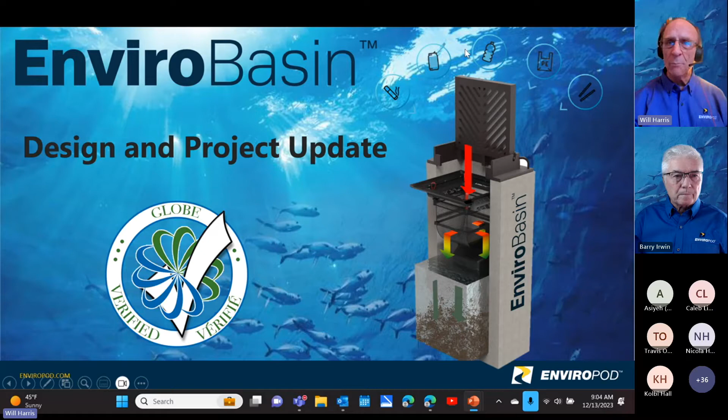I'll be providing an overview about EnviroPod and the LittaTrap, which is our primary product that we introduced to Canada and North America back 4 years ago. Then I'm going to turn it over to Barry Irwin, who's going to do a deep dive into the EnviroBasin design, applications, and different project installations throughout Canada. This will be an opportunity for you to see how this system has been introduced and launched. It's a real game changer of a product, but I'll let Barry take it from there, and we'll start the presentation.

So a little bit about EnviroPod and who we are. EnviroPod was founded by two gentlemen located in New Zealand, Mr. Mike Hanna and Greg Yeoman. As you can see from the photographs here, back in 1996, the company's been around for 26 years, starting in New Zealand. EnviroPod is part of the Stormwater 360 group, which is a leading stormwater and green infrastructure manufacturer and solutions provider in the Australasia region. It's the largest Australasia catch basin insert company, as well as a distributor of different stormwater technologies in that part of the world.

About 4 years ago, both Greg and Mike ventured into Toronto and lived there for a year to get an idea of the market and the issues and demand for stormwater products such as the LittaTrap. They came away with quite a bit of information, finding that demand was rather high, especially around Lake Ontario and the Great Lakes region. From that point forward, over the last 4 years, EnviroPod has been very much involved in providing LittaTrap as well as EnviroBasin products throughout the Great Lakes region, as well as other parts of Canada, including Vancouver and Nova Scotia. We're pretty well spread out through all the provinces now throughout Canada.

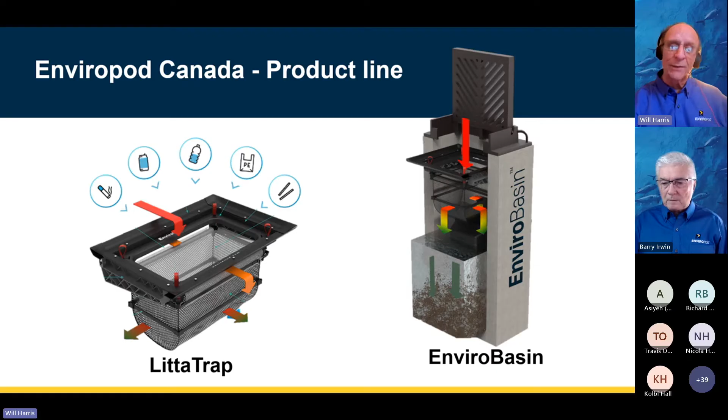So we actually manufacture two products. One is the LittaTrap and the other is the EnviroBasin. I'm going to briefly go through the litter trap and then introduce Barry to discuss updates and design for the EnviroBasin in just a moment.

So this is why we're in the business in the first place. There's a major challenge around the world right now, and in many places around North America, where we're seeing a lot of plastic trash debris getting into our waterways. Everybody has heard of the Pacific garbage patch and now the Atlantic garbage patch, where you have cycles of currents carrying trash to central areas around the Pacific.

We have developed our products around preventing this from occurring, from what you're seeing in this picture here, and it's becoming a major problem. As you probably also see, not all plastic floats to the top. It is buoyant. If you look at a water column, plastic can come in different weights, and the more weight in suspended water, the deeper it can go. So this is what we are all trying to prevent, and what our audience in most cases is trying to prevent as well.

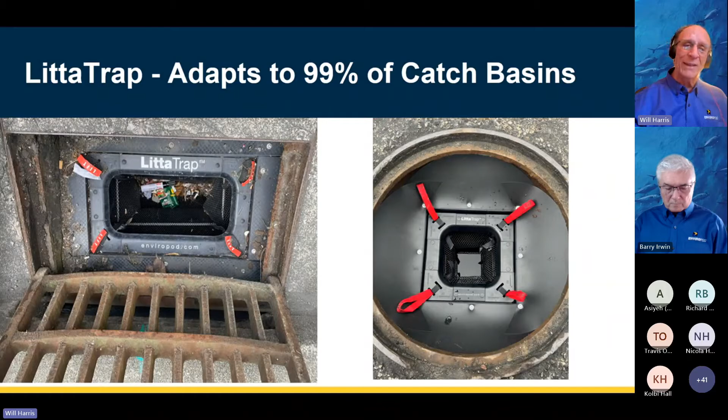The litter trap itself is a product that can fit inside almost any type of catch basin structure. It's designed to be easy to install and retrofitted for any particular type of catch basin. These are examples showing a rectangular type of grate inlet, as well as a round manhole type of catch basin, where we use adjustable seals that can be cut and fitted in place in the field, then able to place a litter trap basket directly underneath the grate itself.

We also provide different types of liners that can be placed inside the basket for addressing specific types of particle sizes. But the primary purpose of the litter trap is to really remove and capture plastic trash and gross pollutants, even down to small particle size sediment as well.

It's also designed to be easily accessible and maintainable, so you can maintain it by hand or by Vactor truck, either way. We're not going to go into a lot of detail today about the litter trap, but if you want to learn more about the installation, operation and maintenance of the litter trap, I invite you to go to our website at www.enviropod.com.

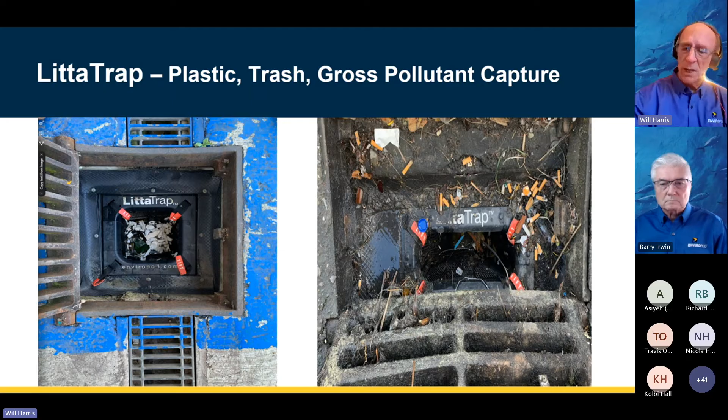The design of the litter trap is really built for northern climates. We have these placed in every type of climate zone you can think of, from minus 20 degrees Fahrenheit to up to 80, 90, or 100 degrees in places like Texas, Miami, Florida, or North Carolina, where it gets rather humid and very hot.

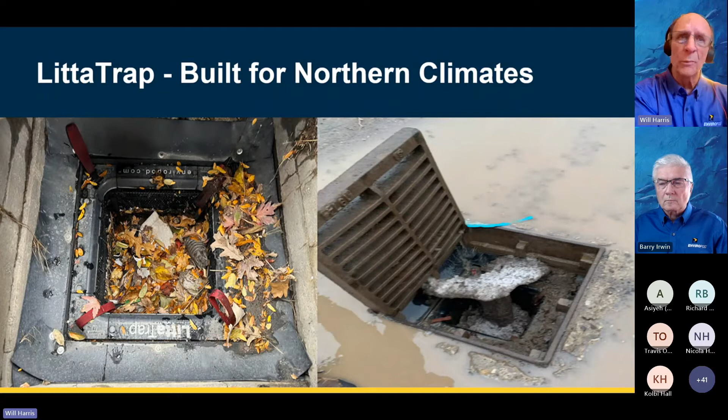The litter trap design, as well as the materials, which are primarily made of HDPE as well as a reinforced fiberglass material, is there to withstand different types of climates, heat or cold, but also to not allow any cracking. And it is chemical proof, meaning the material will not corrode from different types of chemicals that may enter into the catch basins.

As mentioned earlier, we make different types of performance liners for the litter trap that can be fitted and placed inside the basket. They can be easily adjusted and tied together around just underneath the internal bypass of the basket frame itself. These liners are washable and reusable.

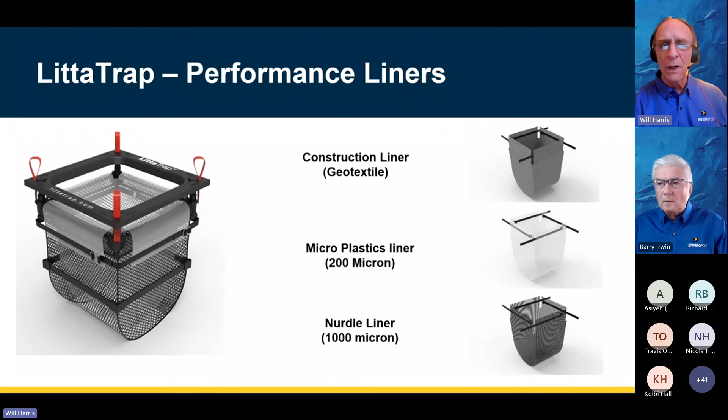They typically have a life cycle of anywhere between 5 to 8 years before you would ever need to replace a liner, but they're relatively inexpensive - we're talking a $30, $40 item if you did need to replace it. So far, we have not had to replace liners here in California, where we use them extensively. But in other parts of the country, it does not necessarily always need a liner. It really depends on the particle size and the pollutant of concern you're attempting to capture and address.

The construction liner is our latest liner, especially for use during construction. The liner can go inside the basket during construction, where the litter trap basket and system itself can be installed in a catch basin, so that any sediment particles or erosion that may occur during construction can be captured in a construction liner and then easily removed or accumulated over time.

Once the construction is over, you can easily remove the construction liner and allow the litter trap to do what it does - capture post-construction stormwater pollutants, which would be a normal, standard type of stormwater post-construction BMP.

We have done quite a number of litter trap projects now with University of Toronto. Their trash team has been using the litter trap extensively around the Greater Toronto and Ontario region. We also support members of Operation Clean Sweep, made up of plastic and chemical manufacturers that have joined this as part of their mission to reduce the amount of plastic entering into waterways.

We're talking about raw plastic, otherwise known as nurdles or pellets, typically roughly about 2 millimeters in size. The litter trap is typically placed at industrial locations in their catch basins, where it traps and captures the pellets or nurdles. From there, the university has been coming into a number of facilities to count the number of pellets being trapped and captured by the litter traps.

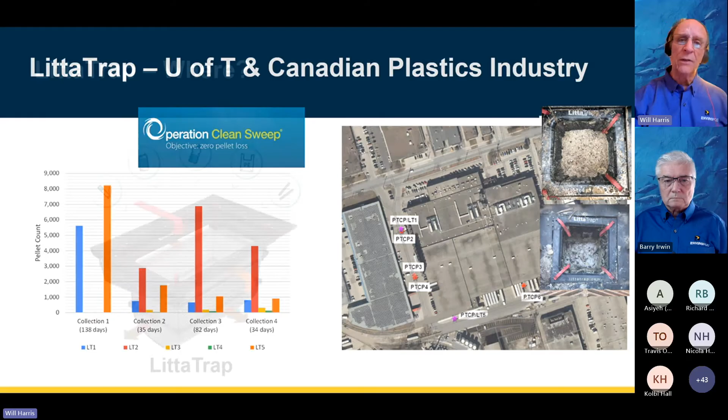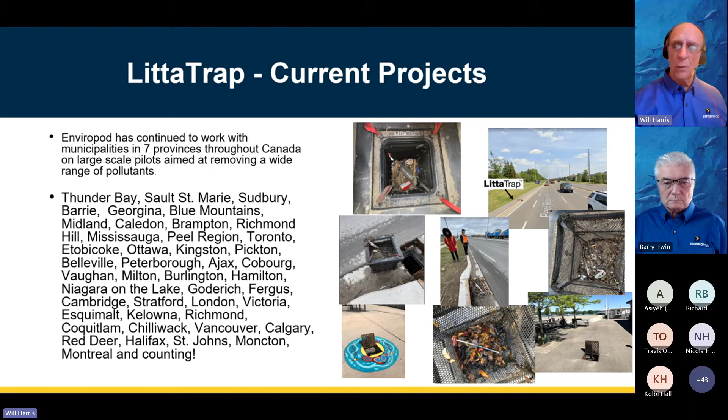Where do we have litter trap? Well, we have it pretty much everywhere now across Canada - from Thunder Bay, Sault Ste. Marie, a long list of different municipalities utilizing the litter trap, retrofitted inside municipal catch basins, as well as at private developments and industrial facilities. Whether it's in Halifax or in Vancouver, BC, and areas in between, we're starting to see more and more litter traps being placed and retrofitted inside existing catch basins, which is very exciting news for us because we're on our mission of preventing trash and debris from entering waterways. A typical municipal project we've done in the past is at the city of Barrie.

Started out as a pilot project utilizing just a handful of litter trap devices inside a handful of catch basins down by the waterfront in the Lake Simcoe area. Over a year's time, the city recognized that the litter trap devices were operating quite well and were easier to maintain than other downstream systems they had already placed, and it was less costly. They had two individuals who would go to each catch basin, lift the grate, pull out the litter traps, remove the debris, and put the empty litter trap back into the catch basin. It took all of about 30 seconds.

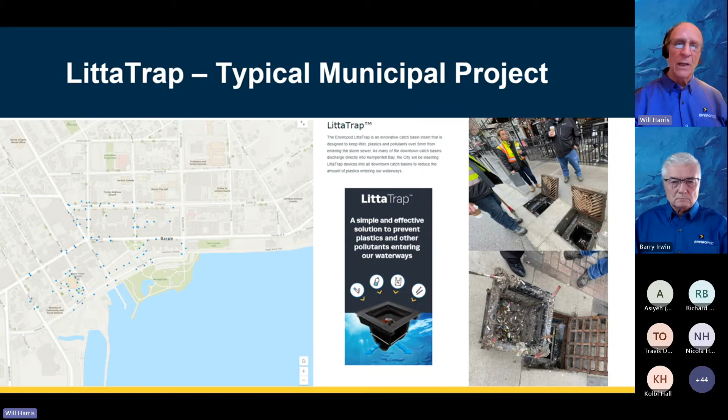That led to a much larger project in which there are now some well over 100, around 110 LittaTraps throughout the downtown city of Barrie area. The primary purpose is to prevent things like cigarette butts or other plastic materials and straws from accumulating inside their downstream receptors. The litter traps have been easy to maintain for the city, and now other cities are recognizing this, which is why the litter trap is gaining such popularity.

Another project we've done in the past year is at St. John's Harbor, where there are some 38 LittaTraps now installed down by the harbor area. This is a very cold region, so it demonstrates that the litter trap can withstand very cold weather without cracking. The information we've received back from Fisheries and Oceans, as well as from the city along the coastlines, is that the litter traps are operating well. They're continuing to operate at those locations, and they intend to use more.

We also provide the litter trap at quite a number of commercial applications, meaning whether it's a retail store, a shopping mall, or a parking lot, as we do in California here. The litter trap is used extensively, whether it's a grate inlet, a curb inlet, or any kind of catch basin.

This is also one of the things we've done over many years of doing studies and finding out what is really being generated at commercial locations. We have a lot of data that's been accumulated, both from our team and from independent third parties, about what is really being captured and the weight and volume of these materials. We're also finding that it can be very seasonal in terms of the amount of accumulation of material, whether it's in the summer or in the spring.

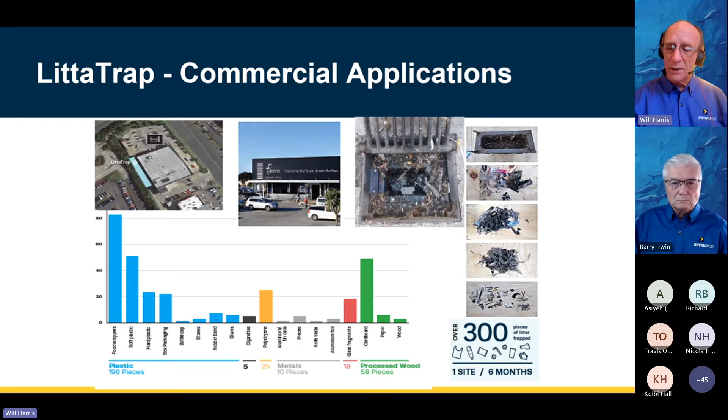Overall, we have seen a very large expansion of the use of the litter trap at commercial applications, as shown by the least amount of maintenance it takes to maintain a litter trap. So with that in mind, I'm going to stop here. That's my introduction on the litter trap, and I'll be moderating the rest of this presentation. I'm going to introduce Barry, if I can get to my screen for a second, and hand this off to Barry.

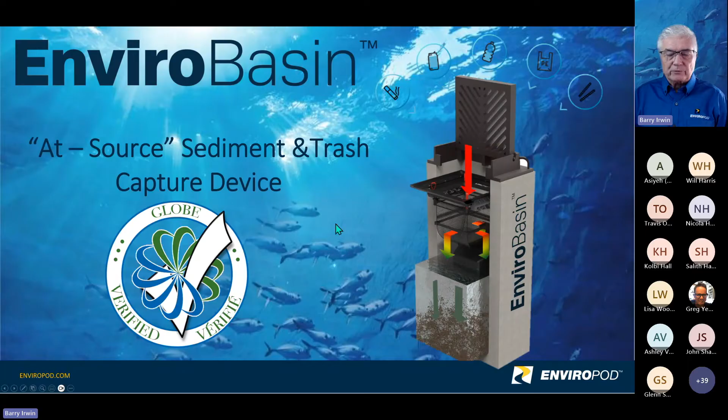Now, the question we ask is, why EnviroBasin? Well, Will talked about plastic, and that is definitely a pollutant of concern. But unfortunately, most municipalities do not regulate all the trash in stormwater. However, they do regulate sediment, demanding in most municipalities here in Ontario 70 or 80% removal of TSS from stormwater. And the reason is sediment is a big pollutant of concern.

It causes billions of dollars in environmental damage every year. It fills up storm drains and catch basins. I was speaking with a municipality yesterday who told me about a Vactor truck that runs around their town all summer, pumping out sediment from their system, from the pipes. And also, sediment gets into stream beds because the stormwater goes down into the catch basin, into a pipe, and heads off to a head wall somewhere on a riverbank, a stream bank, or a lake shore.

In these places, sediment destroys the natural food chain. It destroys the natural habitat, and declines in fish population result. We also have all the nutrients transported in the sediment that cause algae blooms and other problems like that. The reason is most of us live in an urban area.

So we're all stuck together in very tight spaces with lots of impervious surfaces, so we generate what's called city dust. That's all the dirt and pollutants that build up on these surfaces: heavy metals, microplastics from tires, decaying organic matter, pet droppings, all kinds of chemicals, bacteria, pathogens, and hydrocarbons.

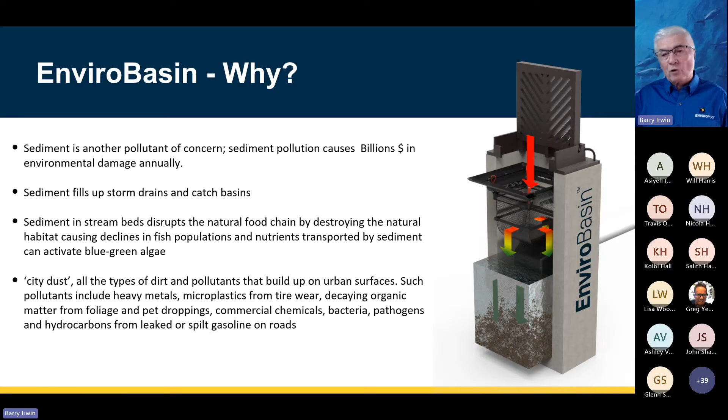Stormwater can be more polluted than raw sewage. So here's where the EnviroBasin comes in, and we'd like to show you what it is. It's basically at-source sediment and trash capture.

At the top of the EnviroBasin, you see we already have the LittaTrap installed, and the LittaTrap is designed to capture the plastic and all the gross pollutants, everything 5 millimeters and up. But the EnviroBasin also has other components, so we can modify the flow of the water and capture and retain sediment here in the sump.

This is a device that's pre-engineered. It's a manufactured solution, plug and play, and it has been tested and verified with the ISO 1400 standard, the ETV oil and grit separator protocol, the same one that any OGS would be subject to, and it will remove more than 60% of the TSS in the catch basin.

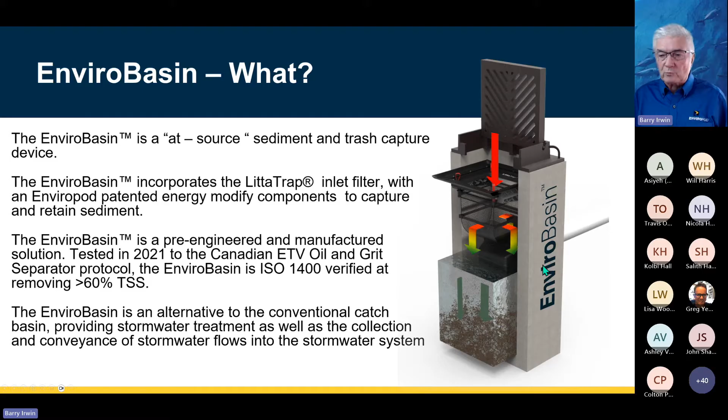That's at source. So what we're proposing here is a real alternative to a standard catch basin, but also an alternative to OGS systems, which are downstream. We have an upstream solution here.

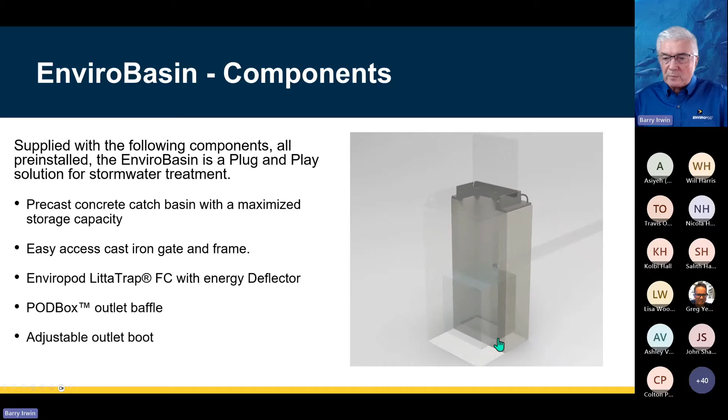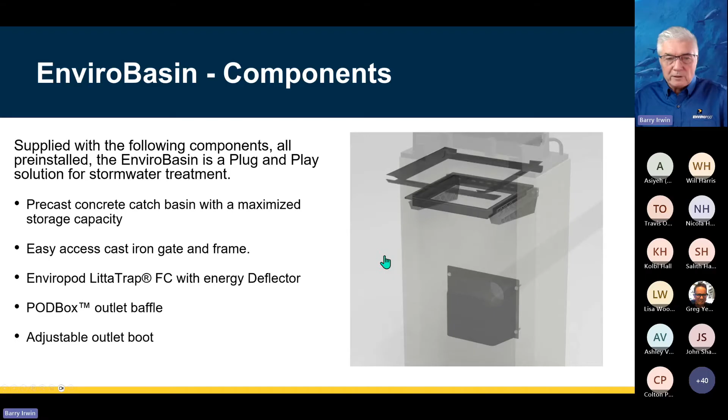This is what it looks like. We have a concrete catch basin with an extra large sump, 900 millimeters deep. We use a submerged outlet baffle that is now removable. We mount the brackets for the LittaTrap in the top, the filter box, the seals, all the things that make the LittaTrap work good, and then the basket.

But to the basket, we add an energy deflector. We'll show you how that works in just a minute. So these are the components.

The only other thing that's special here is we add an adjustable boot on the back. You pick the size, we put it on so that the contractor inserts his pipe, tightens the clamp, and it's basically installed. And the LittaTrap also includes the grate at the top.

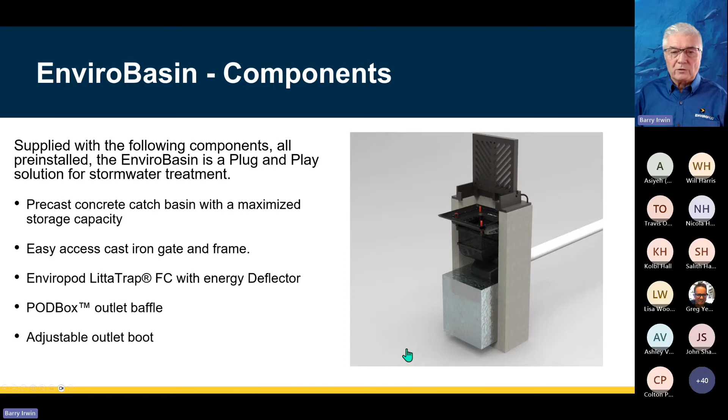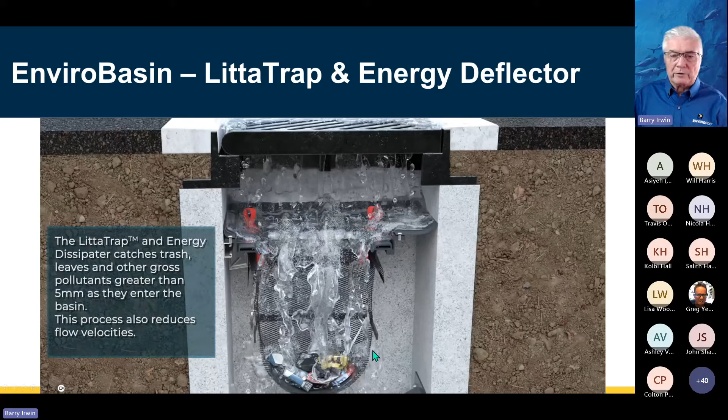So there's the functionality of the LittaTrap itself. It's really designed to capture the trash up here. And with the energy deflector, we reduce the flow velocity of that water because it can get quite ferocious inside a catch basin. Then in the sump, we're able to capture particles larger than 50 microns, so keeping them down here in the sump is really important.

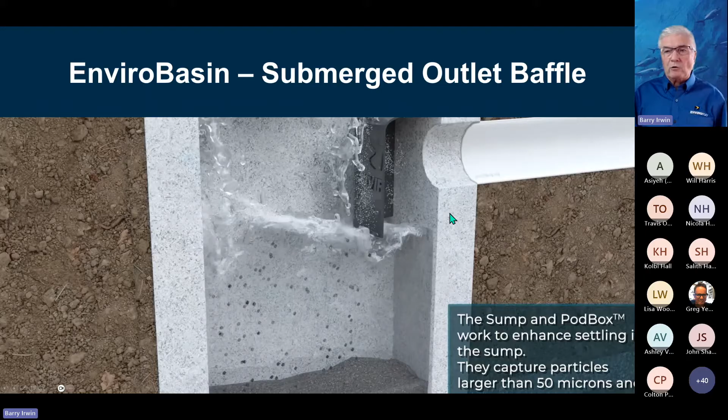The submerged outlet baffle plays a role in that as well. So the result is we're removing in the EnviroBasin 99% of the gross pollutants, that's everything 5 millimeters and up, and 60% of the TSS. We're removing a heavy load from stormwater, and the finished product going down the pipe is much, much cleaner. This is very cost-effective treatment to perform.

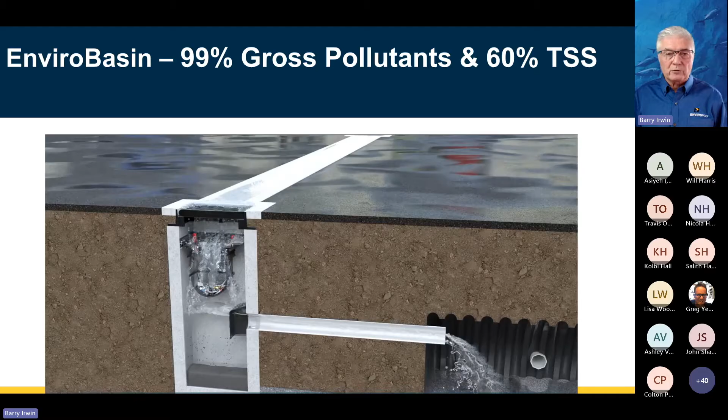Here's some elevation drawings. We have a side and a front elevation. You can see the submerged outlet baffle on both sides, and of course the energy deflector sitting here in the bottom of the basket. Otherwise, it's just a standard LittaTrap installation in a standard style catch basin.

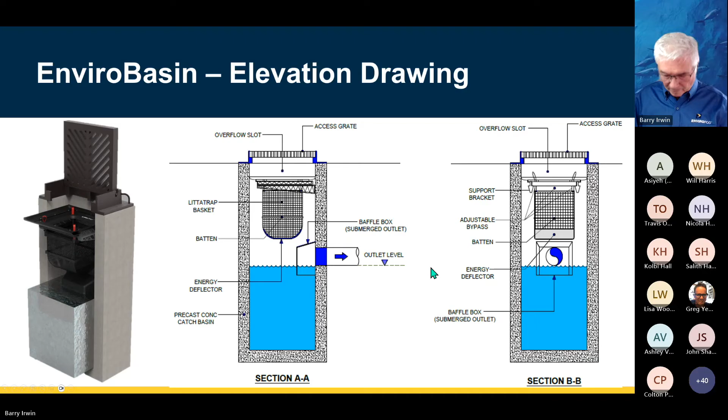So this is a real different take on the catch basin and the way it functions. This is some still shots from video modeling, computer modeling that's been done for a submittal for Washington State. You can see here the streetscape at the top, and we have a grate.

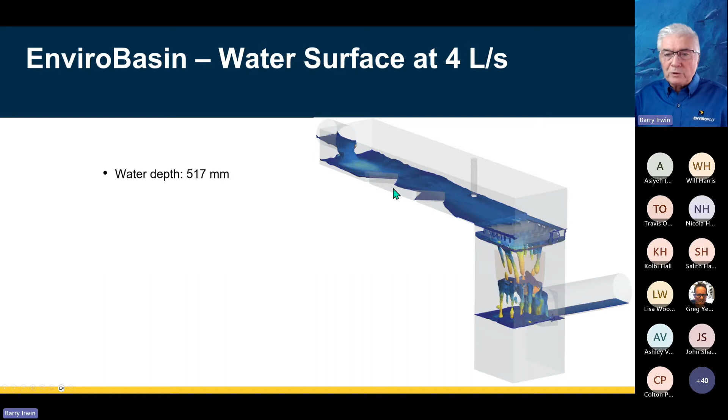We have the LittaTrap basket with the energy deflector. At 4 liters per second surface loading rate, you can see the way it functions internally, and there's absolutely no disruption. The people we're doing the modeling for had a design storm of 30 liters per second.

So here's the modeling for 30 liters per second. You can see that the water flows through the basket with this storm event without any problems. There's no issues, and the energy deflector is still doing its job. The water is backing up nicely here on the streetscape.

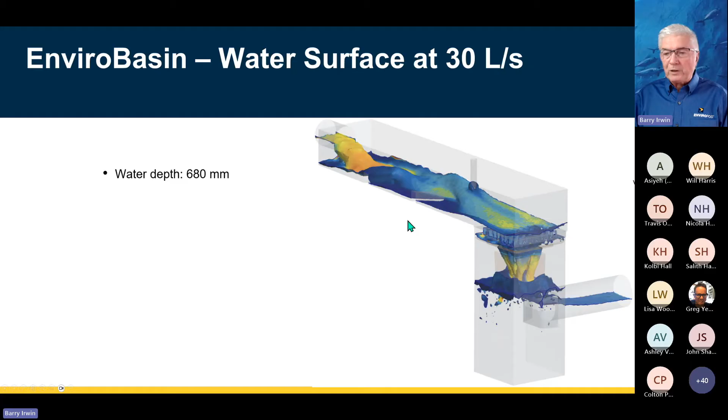Should that basket ever become full during an event like this, remember the basket has an overflow all the way around the top, about 2 inches high, and it will handle 88 liters per second. That's about as much water as can come through the top of the grate. So we feel we're in pretty good space here. We shouldn't be causing any issues with flooding and ponding from the catch basin, even with large storm events like 50 liters per second.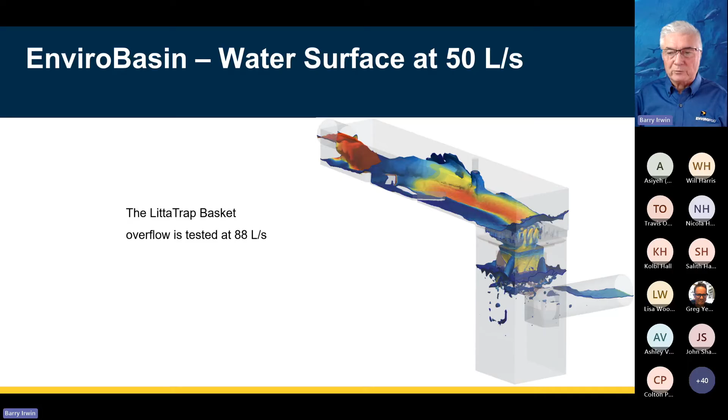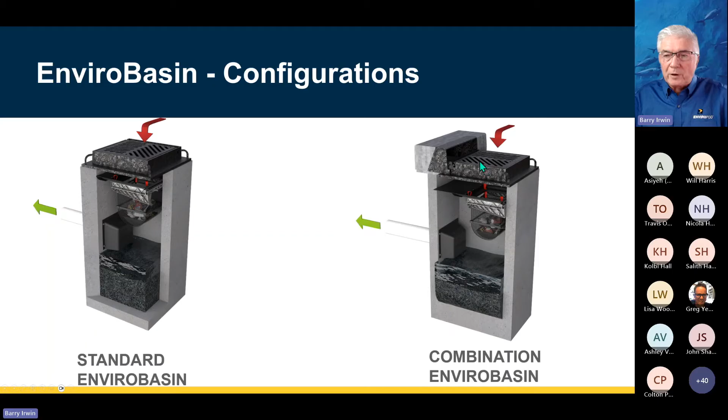Since we first started and introduced the EnviroBasin, we started with a standard catch basin design, but we've had all kinds of demand for different models. So we have a combination EnviroBasin catch basin now, one that incorporates not only a grate, but also a side inlet. We also have an EnviroBasin manhole model, which is sometimes required.

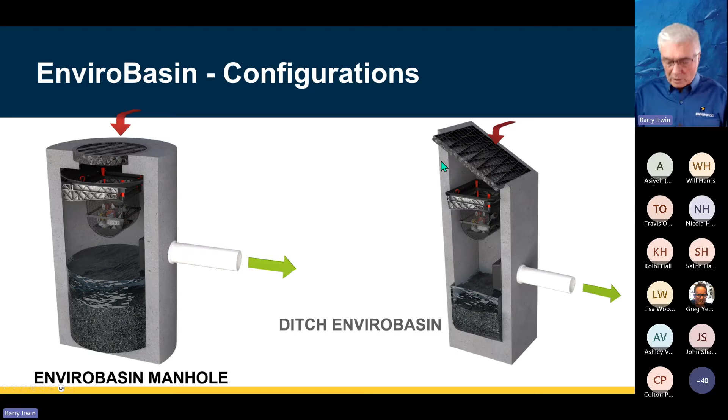We have one that's been designed for a ditch inlet, and we've sold quite a few of those this summer. As well, we have a very popular twin EnviroBasin for a double catch basin application. These are quite popular - we've seen them specified on several projects.

We also have a junction EnviroBasin. Remembering that we can't have multiple inlets into the EnviroBasin - we can only have water coming from the surface, other than perhaps some subsoil drains at the top. We can't have anything disturbing the hydraulics down in the bottom. So if you want to do a junction, you either have to put another manhole or put a cavity right beside the EnviroBasin. This is a slick way to do it, and can save some money as well, because it's one device instead of two.

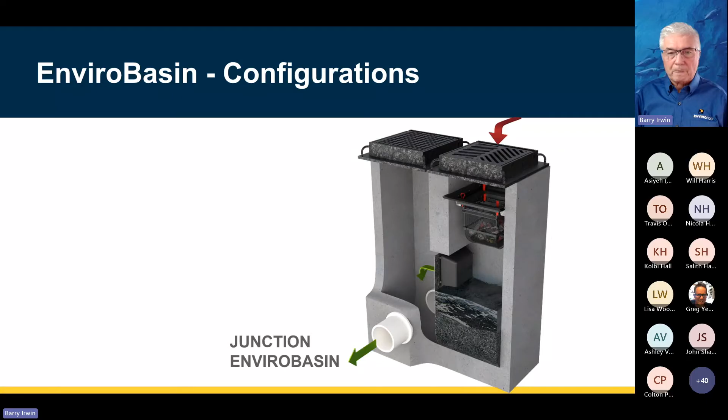The EnviroBasin has been tested to the ISO 14034 test, which is the gold standard for ETV devices and catch basin systems, oil and grit separators. The test results are all available on our website. The verification is posted in its entirety, and it's quite an interesting read. It tells you exactly how the test was done and the results, the standards. You can make your own judgment, but we passed the test very, very well.

It's good to know that the ISO test is probably the most rigorous test. There's another one in New Jersey - the Department of Environmental Protection has a test, and we are going through the process of having the EnviroBasin tested to that standard as well. Very soon, hopefully in the new year, we'll have the results of that test, and we are very confident that we will get excellent results on that test as well, because we've already passed the ISO test.

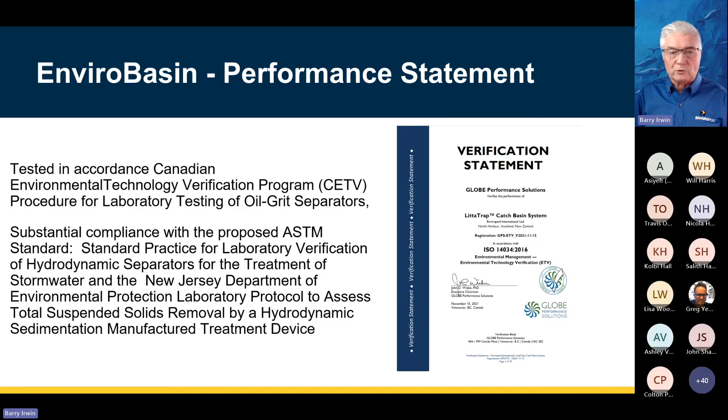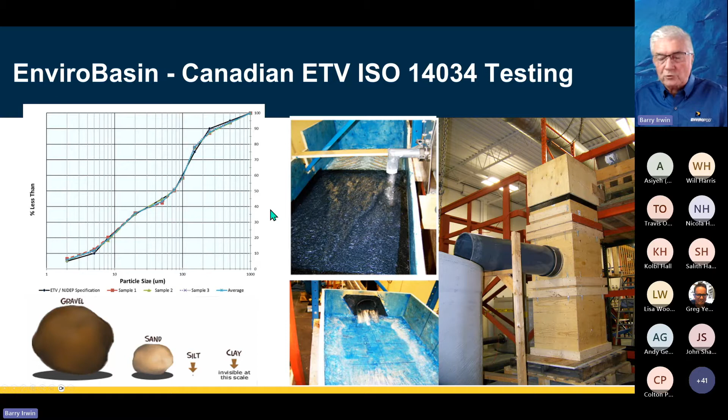The black line in the background is the spec, and you can see where the samples and the averages are right on track with what you would expect from the test. This is the same test that an oil and grit separator would be subjected to, and the EnviroBasin performs very well, as you can see.

It's those first small rain events, the first flush of rain, where most of the sediment is sent into a catch basin. So if you work efficiently at that point, you will capture most of the sediment, and here we're capturing 60%. Even as the surface loading rate increases, we're still able to capture sediment, but maybe not as much. And this is in one catch basin.

So we believe there's an efficiency here by doing it at source with a catch basin, rather than sending all the water down to one device downstream where it has to work extra hard to capture all the sediment.

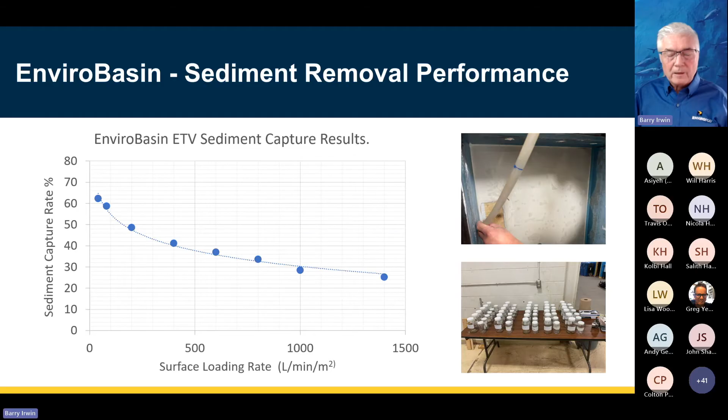Now, the other part of the equation on the test is resuspension. Because if you capture something at a small rain event, and then a big storm comes along, what does it do? It usually just washes all that sediment out. It will resuspend and scour everything in the catch basin.

The resuspension test, as part of the ISO test, fills the sump with a very fine flour material, and runs the test at different surface loading rates. To pass this test, you cannot exceed 20 milligrams per liter of sediment concentration in your effluent.

To put this in perspective, if we go back to the City of London, where they're talking about quality requirements for 90% of the storm events, and they say you have to function well at that level with your total suspended solids, that's all well and good.

But if you get a big storm event and you have a device like a snout or a Goss trap, as soon as that big storm event hits, although that device may have captured some sediment, the storm is going to turn that catch basin into a blender and scour all of the sediment collected from the small rain events, washing it right downstream.

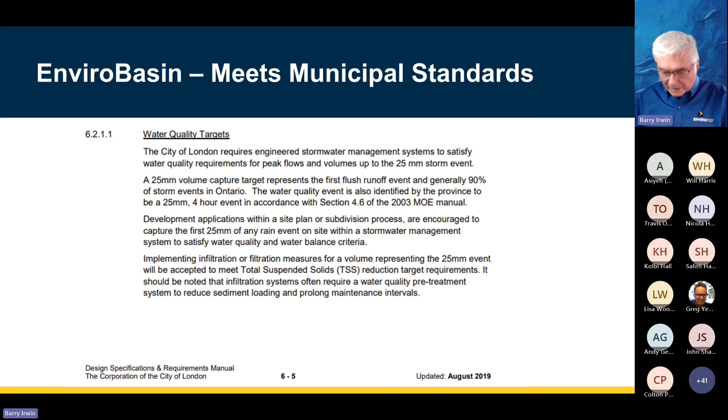So resuspension testing is a critical part of the ISO test, of the ETV testing. The EnviroBasin performs very well, not only at capturing, but at keeping in the sump the sediment that it captures.

This brings us to a juncture where engineers, municipalities, and developers have an option. In the past, you always had to use a downstream solution, running the catch basins into an oil and grit separator, but now you can do it all at source, capturing the trash as well as the sediment.

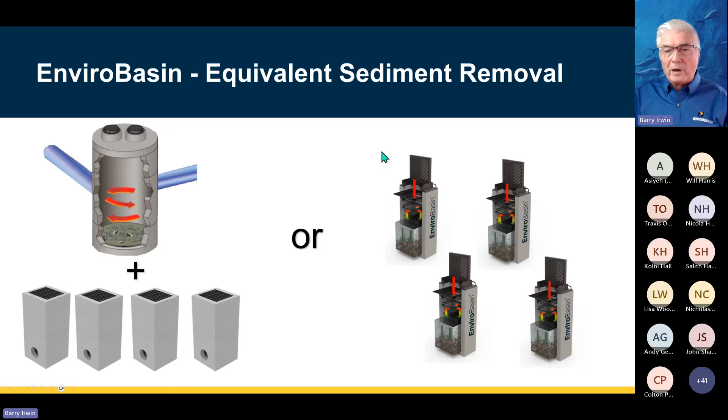It might be noted that not all oil and grit separators are good at capturing trash. Anything that's floatable usually will go right through the baffles in these systems. So by having the LittaTrap here, we perform an extra service for any community using the device.

Using the EnviroBasin versus an oil and grit separator provides a lot of advantages. We'd like to review a couple of them here.

First, we have a very rudimentary diagram. Anybody in the oil and grit separator business wouldn't be too impressed, but here we have a rudimentary diagram of an oil and grit separator. Some of these things are really large, taking up the size of an intersection. Notice the ladder rungs here, a reminder that these things have confined space access requirements when it comes time to maintain them, and they must be maintained on at least a yearly basis and inspected.

So it's a very expensive process. They're very large, the excavations are huge sometimes. And they also have what is the driving head requirement, which can be 50 centimeters, 60 centimeters, sometimes more or less, depending on how big the unit is. And they don't work without that, because you need some force on the water to make the thing work. So that means you have to take that into account in your elevations, measuring back from the pipe at the end of the street.

And with the EnviroBasin, there is no driving head requirement because all of it takes place inside the catch basin. So you can do other things with your elevations and your grades rather than plan for a driving head. And that can be a real advantage if you have, say, rising lake level, perhaps a high water table.

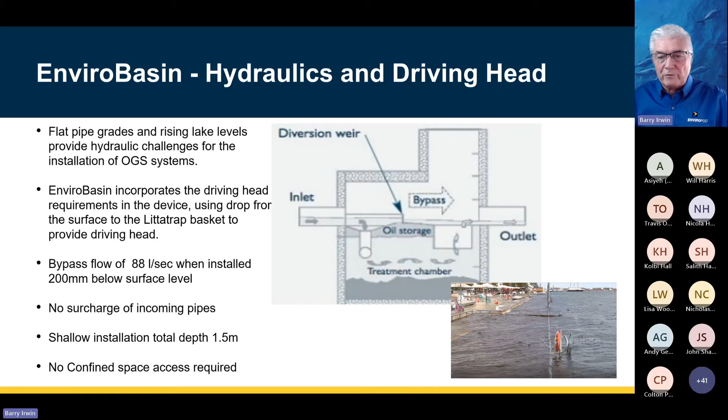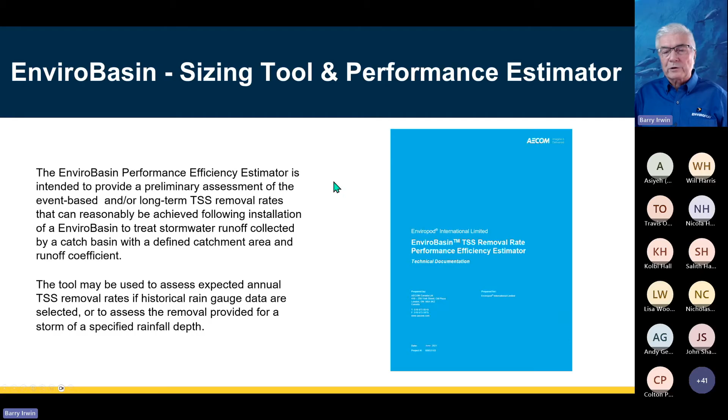We have at EnviroBasin a tool that helps engineers and contractors plan for the performance and sizing of an EnviroBasin system. We're more than happy to share that data and information from the tool with anybody that asks. One day we hope to have it on our website, but in the meantime the tool is working very well, and we can turn around a design project in very short order.

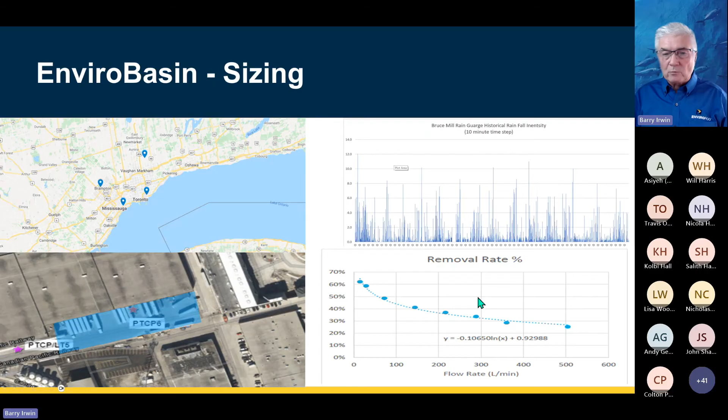We just need some basic data about the rain, catchment areas, runoff coefficients, all basic information, and then we're able to produce a sizing report, much like this one here. This is just an example, but it does show you the information that would be provided, along with a count of the number and design style of the EnviroBasins that would be required.

This is a free service, and the contractors and engineers that have been taking advantage of it tell us that this is really all they need for a submittal, and they're working. These are working very well. So you'll get the efficiency as well as the size.

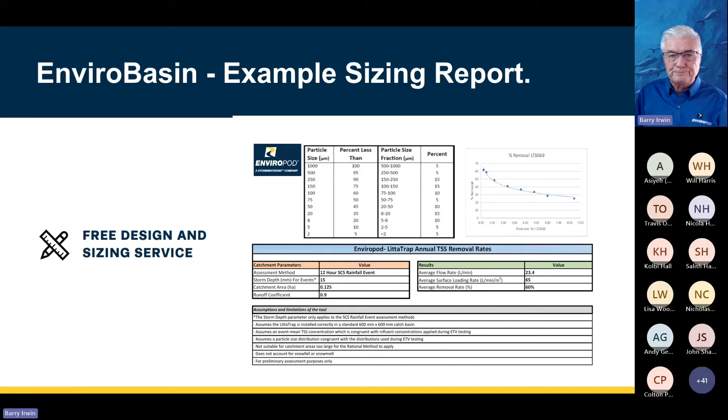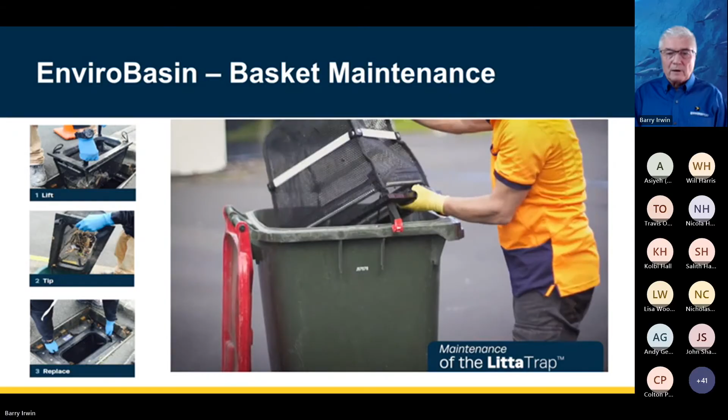We'd like to talk about maintenance of the basket. Sometimes people think it's a lot of work, but this video sort of puts it in perspective. We're able to see that lifting the grate and removing the basket can be done very easily by hand, as we see here. Putting it back and closing the grate.

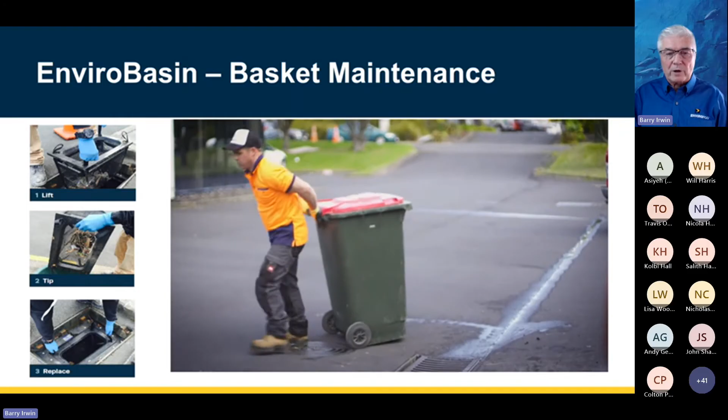So two men in a pickup truck could do 80 to 100 of these a day. And we know this because we have like 60,000 baskets installed all over the world, and many studies have been done on this. So 80 to 100 baskets emptied by two men and a pickup truck in a day is a pretty efficient way of dealing with the maintenance on the baskets.

Now, if we're dealing with using a Vactor system, you can empty the basket out with a Vactor here. We suggest a rubber boot to protect - please don't drop a big metal Vactor hose down inside the basket. We want to protect the webbing, but it will Vactor out all of the trash and any grit.

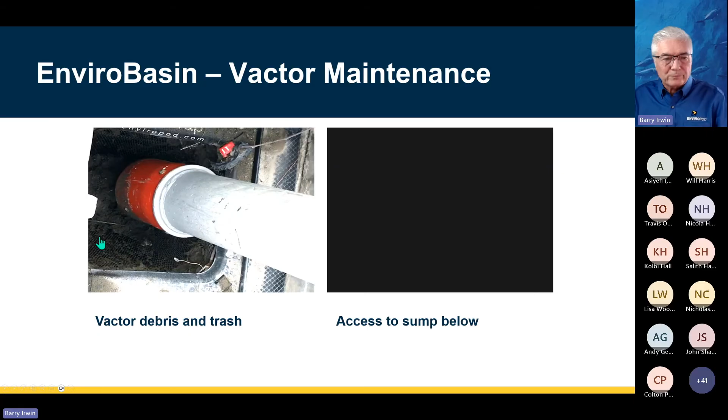In this case here, we can see that this environment produced a lot of grit, which is actually being caught in the basket, which is quite interesting. And LittaTrap has been known for many years for being able to capture a lot of sediment and grit. Once you get something in the bottom, it starts to stick there quite easily.

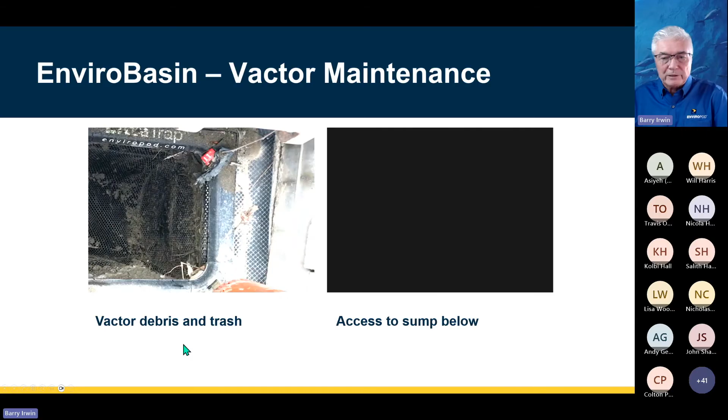But after you've emptied the basket, all you need to do is remove it. Now you have full access to the sump below. And here you can see the sediment, all the fine flour that's been collected down there, with all the zinc, the heavy metals, all those things that we mentioned earlier when we talked about that problem pollutant of the sediment.

So a maintenance schedule for a catch basin, or an EnviroBasin, would be vactoring out the sump on say a 2 or 3 year cycle, versus a 1 year cycle for, say, an oil and grit separator. And the basket between 3 and 6 months would have to be checked, emptied, depending on how much loading it had, and that's entirely dependent on the environment. If you're finding it needs to be emptied 2 or 3 times a year, well, that's a good thing, because that means you're preventing a lot of trash and organic debris from going downstream.

The sump in an EnviroBasin will hold about 320 liters of storage. So when you compare that to the storage in an oil and grit separator, we believe we have more storage capacity because we're multiplying the number of catch basins by this 320 liters, and we believe that's a lot of storage. So a 2 or 3 year cycle on a system involving the EnviroBasin seems quite practical. The basket itself will hold approximately 40 or 43 liters of trash.

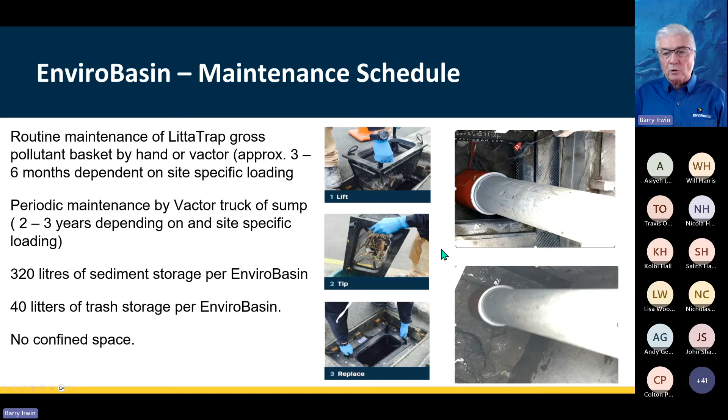And you'll notice that all of this work is being done from the surface. No one has to go down a ladder inside or do any confined space access.

Municipalities that are implementing the systems find that they are reducing their maintenance costs in reality. And that's because we're not seeing all these plugged pipes. The gross pollutants are captured in the basket, and the sediment, 60% of it, is now being captured in the sump. So that means we're doing a good job of reducing maintenance costs downstream.

If you're emptying the sump only every 2 or 3 years with a vactor truck, and the basket only a couple times, that means you need less maintenance, because it's very expensive to unblock drains and these types of systems. And every municipality has a line item in the budget for doing this kind of work.

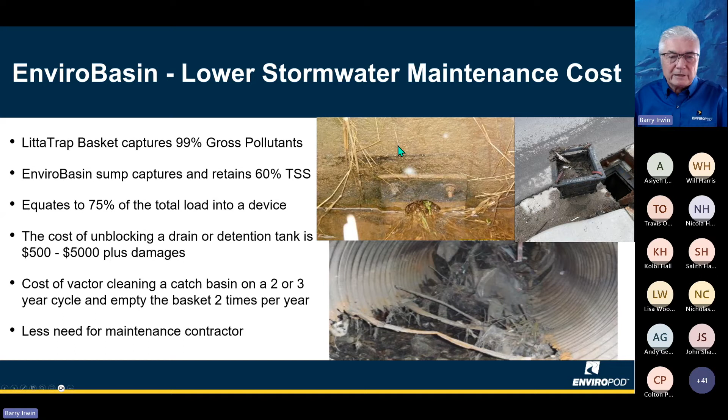EnviroBasin is also an excellent choice when you're doing pre-treatment for all kinds of different LID programs. Here's a bioretention planting with 2 EnviroBasins. If this was an oil and grit separator, you'd have one big head wall, and it's not as efficient a way to water the bioretention planting.

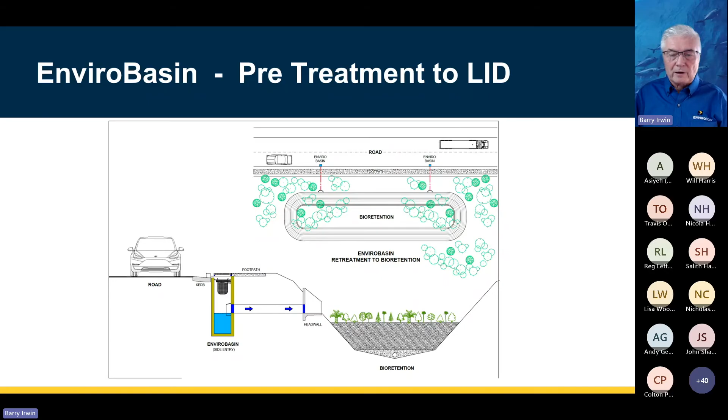You can put EnviroBasins where they're needed and put the water right into there while removing the sediment and the trash. That is really essential to remove, because that's what degrades these systems. They fill up with sediment, fill up with trash, you have to dig them out and then rebuild them, and that's very expensive. So longevity and good performance here with the EnviroBasin for bioretention.

Tree cells are an excellent place to use EnviroBasin. We put all the effort into these cells with the design of the support systems. The soil has been calculated to quantity and type. We know exactly how to make a real healthy environment for a tree, but if we just depend on water going into the small space at the top, the tree is not going to do very well.

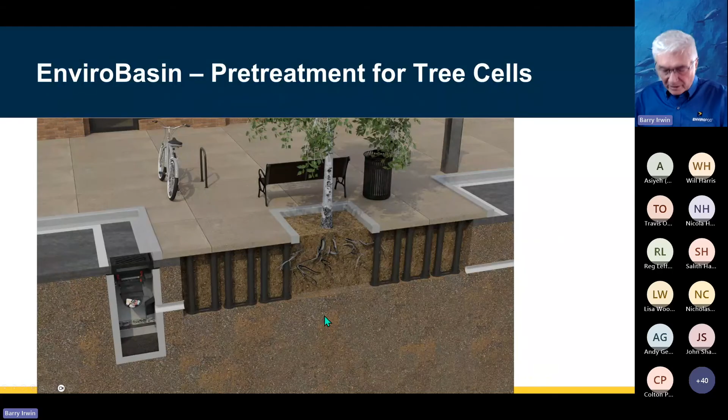So by giving the tree access to water from a catchment area and using an EnviroBasin, removing the sediment and the trash, what better way to water the tree and ensure its longevity and health? So here's the same idea again, using the EnviroBasin for a tree cell.

Infiltration systems benefit from the EnviroBasin by a great deal. Here you can put the EnviroBasins anywhere they're needed, conveniently from your catchment area. You don't have to pipe the water off to an oil and grit separator and bring it back. And you're able to remove all the plastic and the sediment that is so destructive to infiltration chambers.

You want that percolation system to work for a long time, and plastic and sediment will reduce the longevity by a big factor. In fact, they're tearing out old systems now, 20 years old, finding they're just full of plastic because they didn't use pretreatment. So EnviroBasin as pretreatment for these systems is a really excellent way to go.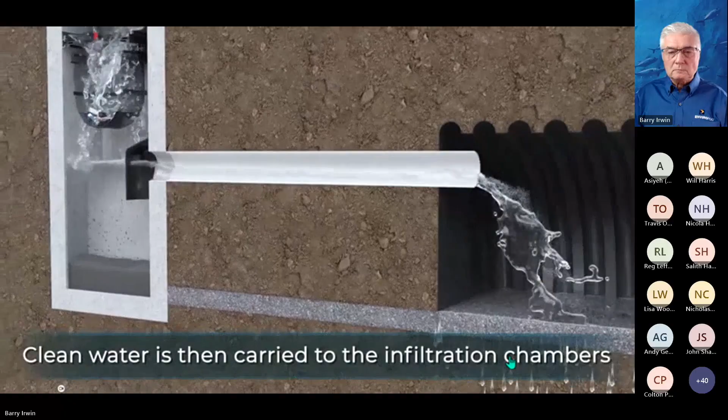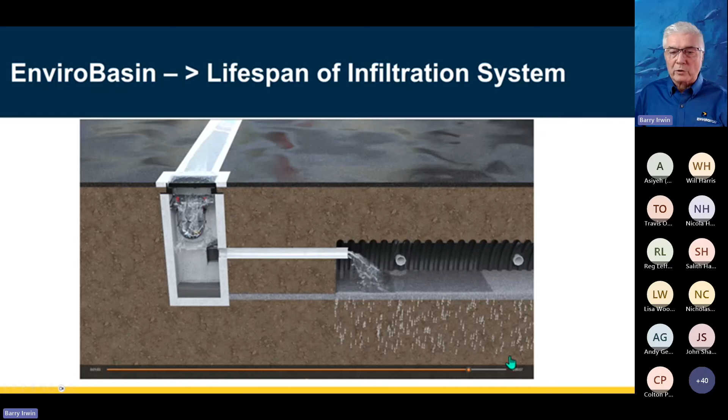So you can see that there's less infrastructure involved by using EnviroBasin here for pretreatment and an infiltration system. And it will greatly increase the lifespan and won't degrade the percolation rates in your infiltration system.

The EnviroBasin is also a great idea for sensitive environments, marinas, waterfronts, ports, because you don't always have the ability to use other types of treatment. And of course, these areas don't need the extra load from sediment from urban areas.

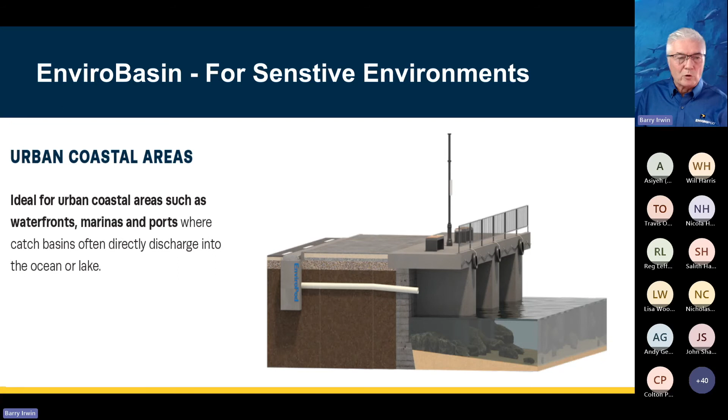Here's an example of a parking lot, two identical parking lots. The first, on the left side, is done using an oil and grit separator and four catch basins, one manhole, and then we have the roof water.

On the right-hand side, we have four EnviroBasins and a manhole. The roof water goes straight through to the main stormwater line because it doesn't have sediment to be treated, no trash. The EnviroBasins deal with the water from the parking lot, so here we're able to have much less infrastructure, much less load on the site plan, and a lot less cost because of the reduced infrastructure.

Many developers are starting to see that this is a viable alternative, and we have many projects on the boards right now where this very consideration is being done. So keep that in mind.

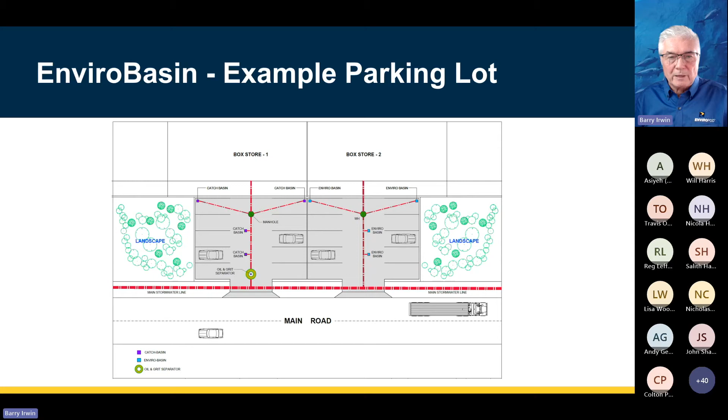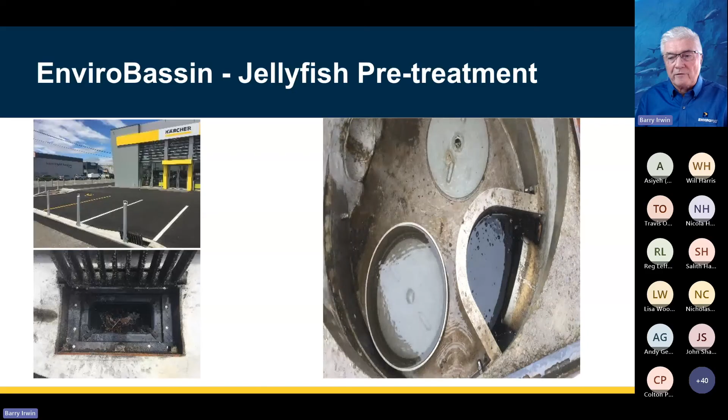Pretreatment for jellyfish units: these units and other devices like them do a great job, giving very high performance rates on TSS removal, but they do not like trash and they do not like sediment. By using EnviroBasin as pre-treatment, you will extend the life of those cartridges manyfold and save a lot of money.

So where is EnviroBasin being used? We've been on the street now for about 1.5 years, and we have several projects. We'd like to highlight just three here.

This one is in London on Southdale Road. It was a big roundabout with 34, I believe, EnviroBasins installed. There were some double catch basins, a lot of singles, and also some ditch inlets installed on this job. The whole program has been completed now, and the contractors tell me they've had absolutely zero installation issues. It was just like installing a regular catch basin.

When you open up the grates on these EnviroBasins, they already have the litter trap inside, the seals are installed, and they're ready to go. We're just waiting for some stormwater here, and we'll follow up with more feedback on these installations in the months to come.

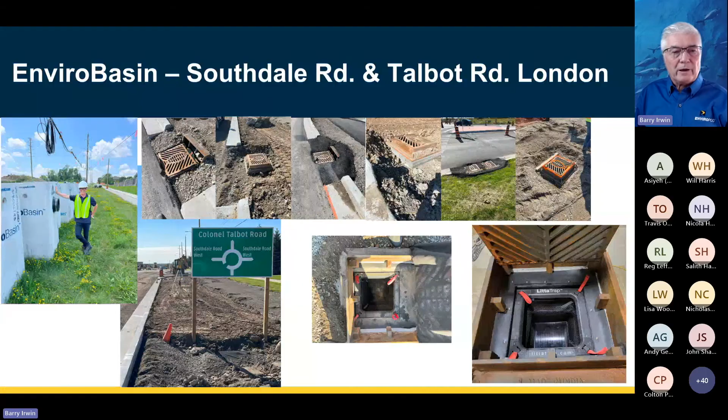In London as well, down the street from the other project, there's a lot of construction going on in that part of London. At Liberty Crossing, they installed some EnviroBasins too. You can see these were just waiting for the curbing to happen. The litter traps are all installed, and they're just waiting for the pavement and the stormwater to arrive, and they will perform very well.

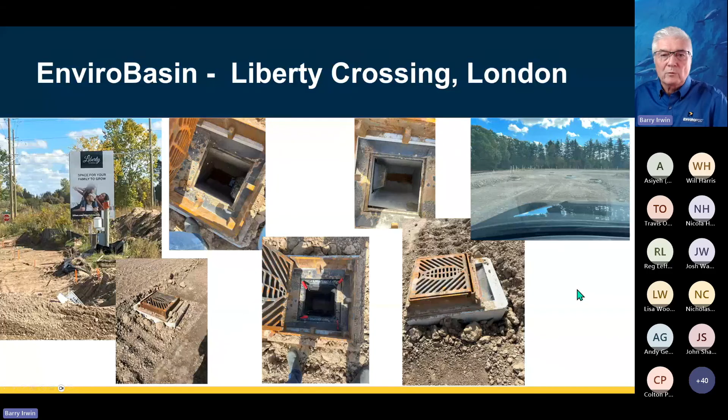Now we're doing some interesting field testing. We have the lab results, but field testing is always appreciated by everybody in the industry. So in conjunction with the University of Western Ontario and AECOM, we have a site on Dingman Drive, measuring very carefully the flows, the capture, and the effluents, and all the rest that goes into making a good field study. Right now we're capturing the background rain events on another site, gathering the data there so that we can prove out the testing here.

Barry, this is Will—yep, we have a couple more minutes. This is the last slide, and then we'll get to questions. Got it, thank you.

So here we are at the last slide, and we just wanted to do a quick review of the benefits for the EnviroBasin. We talked about trash: 99% trash capture, 60% plus sediment capture at source. We have a device, the EnviroBasin, ETV verified, and it performs the same way as an oil and grit separator at removing 60% of the TSS. Minimal hydraulic effect, no driving head requirements, very easy maintenance that can be done by hand or Vactor.

Using the EnviroBasin results in less infrastructure, not more. That's the advantage of doing it at source. It's great for all kinds of low impact development, and of course the whole thing was designed and tested here in Canada, so we know it works in the Canadian environment. We have many of them installed, and we have hundreds more on drawing boards and specifications that we're dealing with on a daily basis.

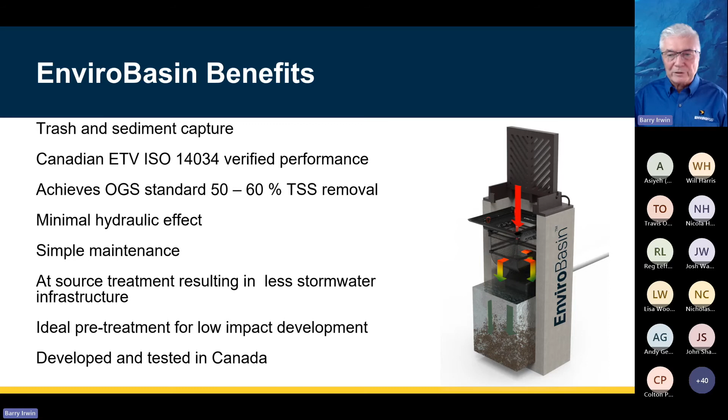Barry, that was great, fantastic. We do have a few questions from the audience, and we are going to try to keep this to the top of the hour if we can.